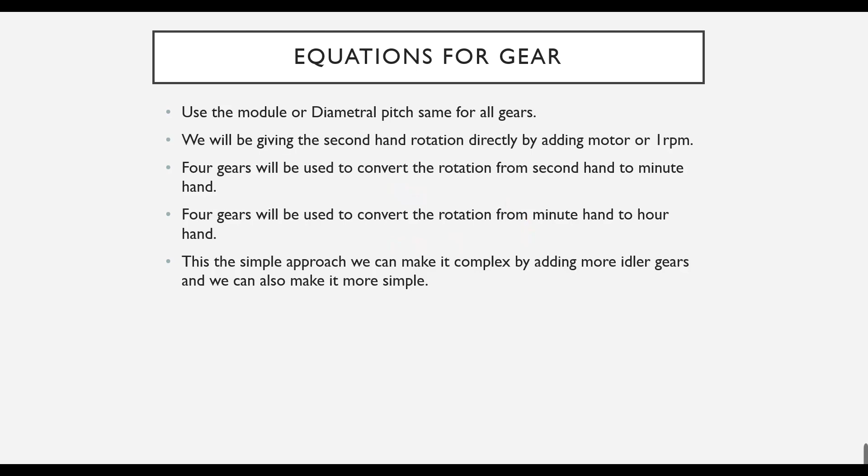Now we can also complex this by using different idler gears, and we can also make it more simpler by using only 2 gears to convert the rotation from second hand to minute hand. Now you can see on the screen we require 1/60 gear ratio in order to convert the rotation from second hand to minute hand. As you know, when second hand completes its 60 rotations, then 1 minute hand rotation will be completed. So here is the gear ratio for the compound gears.

Now T1 and T3 are the driver gears, and these will be the teeth of the pinion, and T2 and T4 are the teeth of the gear, which will be bigger in size. So here are some calculations. As you can see, I split this 1/60 into 1/6 and 1/10. So T1/T2 is equal to 1/6. Similarly T3/T4 will be equal to 1/10. Here is a mistake. This will be T3/T4, as you can see here.

I will be skipping some extra work. I just changed the equation for module into radius, and here x is the distance between center of gears. Here you can also define x as r1 plus r2 or r3 plus r4. So we have to assume the module or diametral pitch. I will be working with module, so let's say I assume 3. So if I assume module 3, then I will have to calculate, or you can say assume the value of x, but there will be a pattern to assume the value.

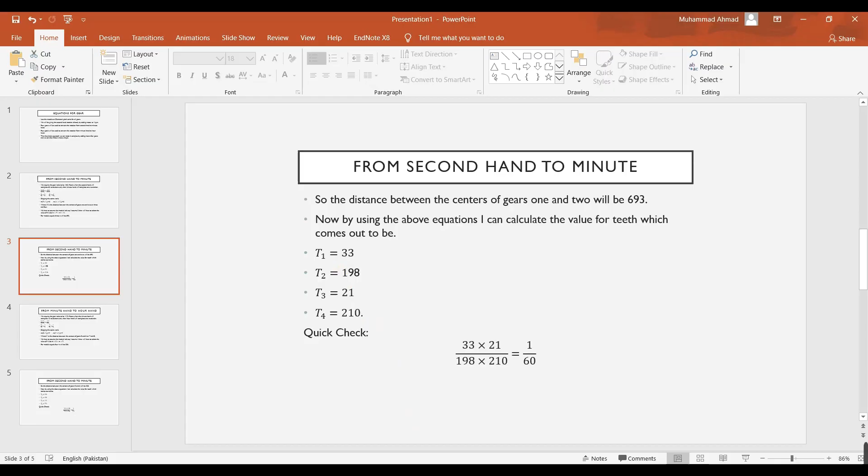Now here some properties of the gear can be changed. So select module 3. Now for the first gear our number of teeth are 33, so we will select 33. Select 33 right here. Keep pressure angle 20, face width 4, or you can change it.

Now hub style, select B, because we have to create a shaft afterwards, so you don't need to create a shaft if you select hub style B. Here make the hub diameter as you want. I will keep it 7. Overall length make it 50.

Now nominal shaft diameter keep it 6, or you can change it, you can make it 4 as you want. Keyway make it none, and show teeth make it 33. Select. Here it is asking for another component, just cancel it. Now we need to save it. We will save it as part file. Save as, gear 1. Now save it as part file.

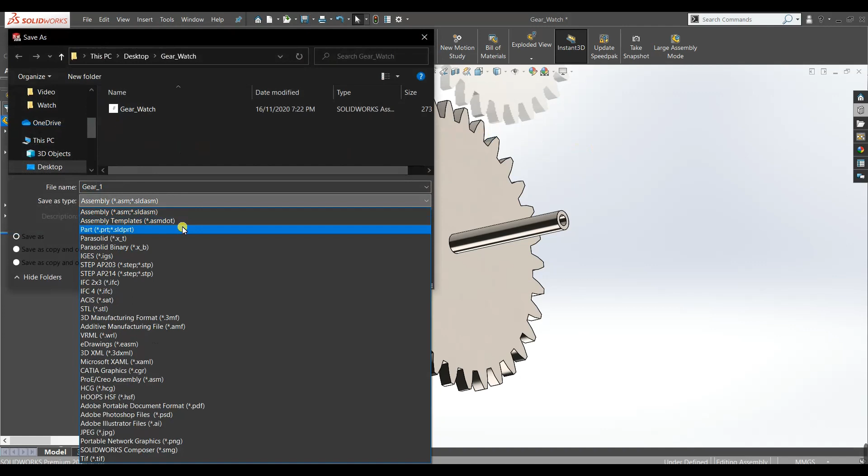Now we will create gear 2. If it is asking to save it, if you want to save the assembly in order to make the changes, you can save it, but I will not save it. So I will say don't save. I will create a new assembly. So again drag a spur gear. Now I will create gear 2 which has 198 teeth. So just select 198 teeth. Here we have 198.

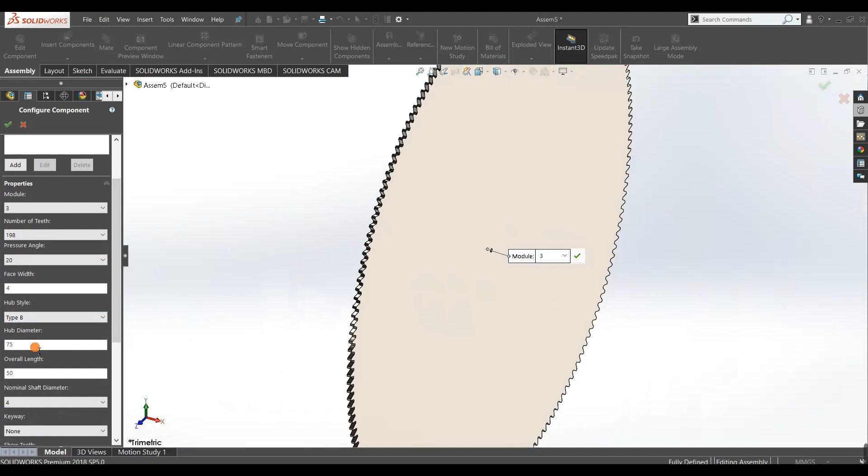Now face width 4, hub style B, hub diameter make it 7, overall length make it 30 or 40, sorry it is 50, 40, we have to make it 40. Nominal shaft diameter make it 5, keyway none, accept it. Now cancel it and save it as part file. Save it as part, gear 2.

Going to gear 3. Again, drag a spur gear. Module 3. Now we will make gear number 4, and then afterwards we will make gear number 3. 210. Face width 4. Now we need to make the nominal shaft diameter 7 and make the hub diameter 8. Accept it. Save it as gear 4 part and gear 4.

Now again, spur gear. Now we need to make it, it was 21, right? We need to make it 21. So here 21, face width 4. Hub diameter, now we don't need hub. Nominal shaft diameter, make it 7. Accept it. Cancel. Save it as part file and gear 3.

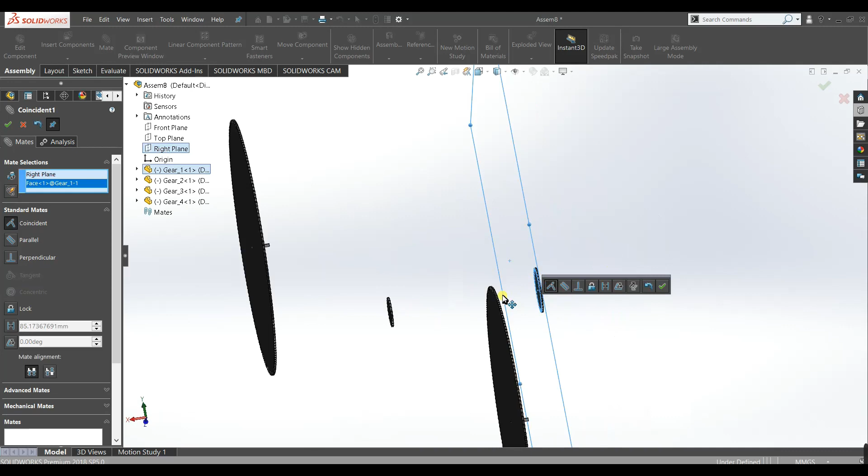Now we will assemble the first 4 gears and then we will make the further gears and then we will make the further assembly. So first we will assemble the first 4 gears. Go to assembly. Now we need to open these 4 gears. Open. This is the first gear. Now make it float. Mate the right plane with this back face here. Make it coincident. Accept it.

Now we need to draw a sketch on the right plane. We just need a center line to define the center to center distance. The center to center distance, we calculated right here, 693. Now this is D1 plus D2. I mistakenly spoke it R1 plus R2. Basically it is D1 plus D2. So we will just divide it by 2 and the answer we get is 346.5. So make it 346.5. Accept it. Make sure it is coincident. Accept.

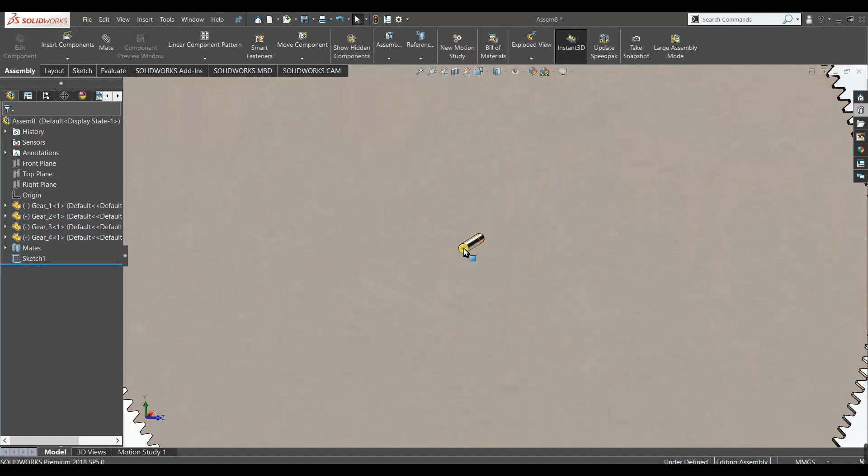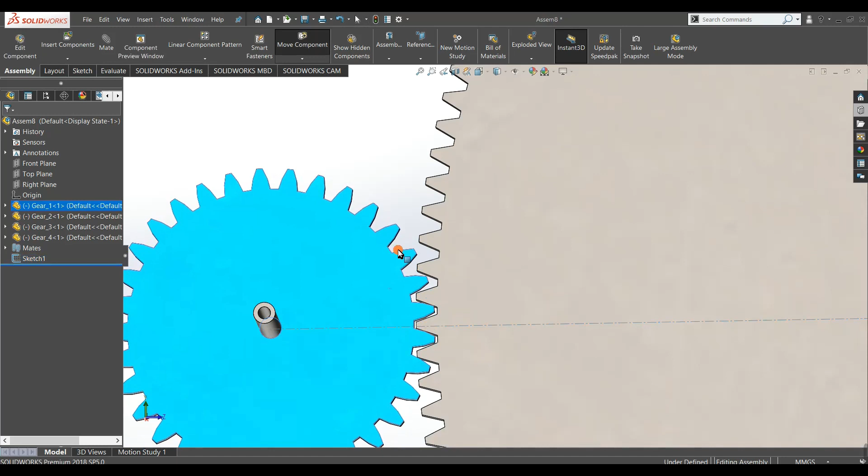Now we need to select this face of gear 2 and mate it with this point right here and make it concentric. Accept it, and make this face and this face coincident. Accept it. Now we need to make this point and this face concentric. Accept. Now these two gears are defined completely, and you can see the gears are perfectly meshing.

Now we will add a gear mate. Go to mechanical mates, gear mate, this face, and this face right here. Now give it the number of teeth. It was 33 and it was 198. Accept. Now we will see if the gears are perfectly meshing or not. So yes, you can see the gears are perfectly meshing. It is perfectly working. Make it hide.

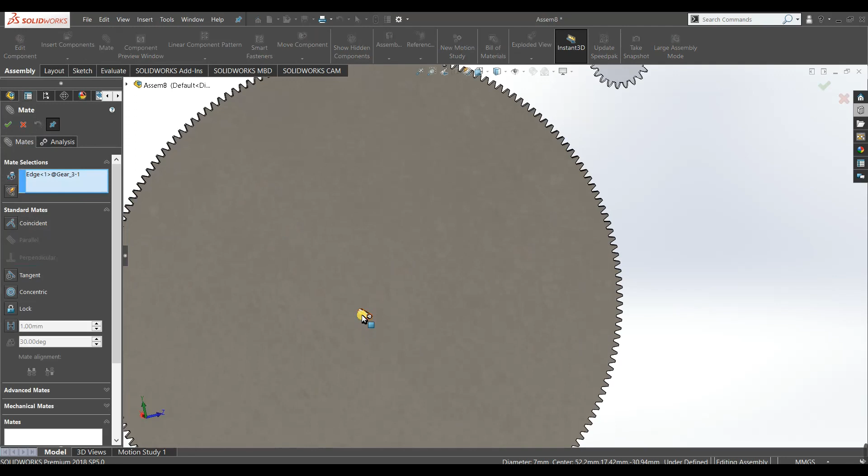Now we need to make this gear mate and concentric with this. Now just drag it up a little bit. Now the motion will be transmitted from gear 2 to gear 3 via a key. So we need to make a key. Open this part.

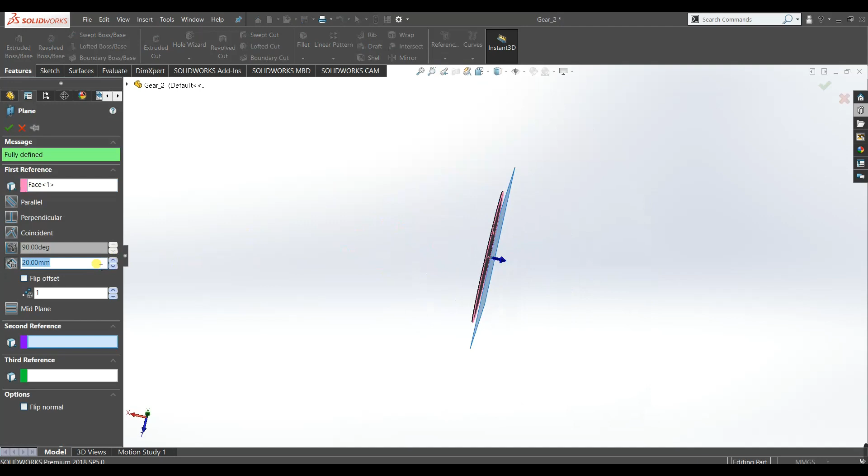Now we will define a plane. Make this face first reference and make it 20 mm. Now sketch on this plane. Make it normal. Now select a line. Make it construction geometry. Now select a corner rectangle. Draw a rectangle like this. Make this edge and this edge concentric.

Now make these two points and this line symmetric. Now define this length as 0.5 and this as 1. Now extrude it up to 4.

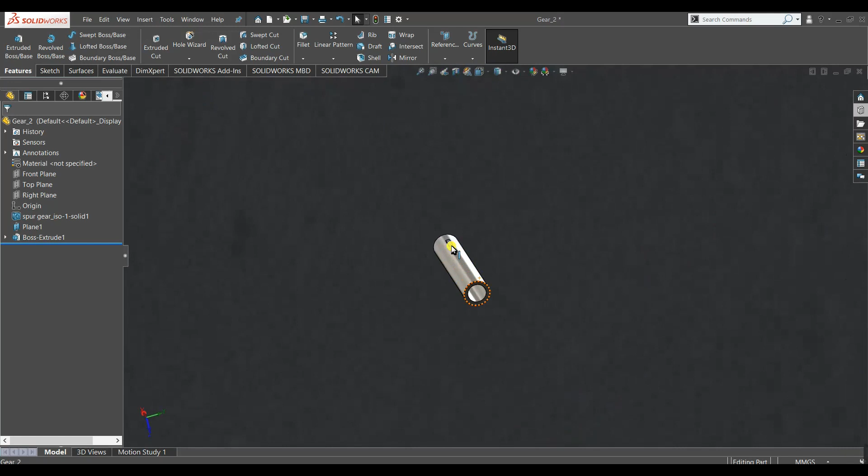In watch gears there is not very much power to be transmitted, so this keyway will work. So our keyway has been generated. Now go back to assembly. Now we have to make a keyway in this gear 3. Open this part.

Now select this face, sketch. Okay, make a corner rectangle. Select, draw a center line like this. Okay, now make these 2 points and this line symmetric. Now dimension it 0.5 and it must be 1. Okay, now it looks fine.

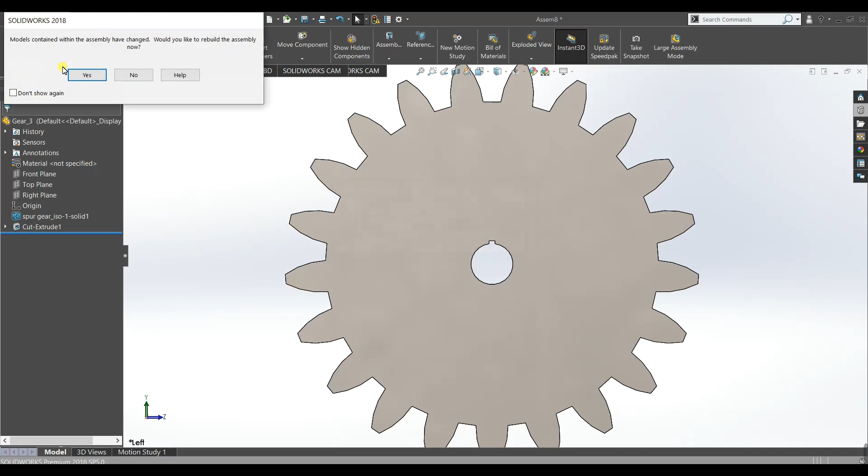Now make an extrude cut through all. Okay, now our keyway has been generated. Go back to assembly. Okay, now select this face right here and mate coincident with this face. Make it coincident. Accept it. Okay, there must be some error. Let me see.

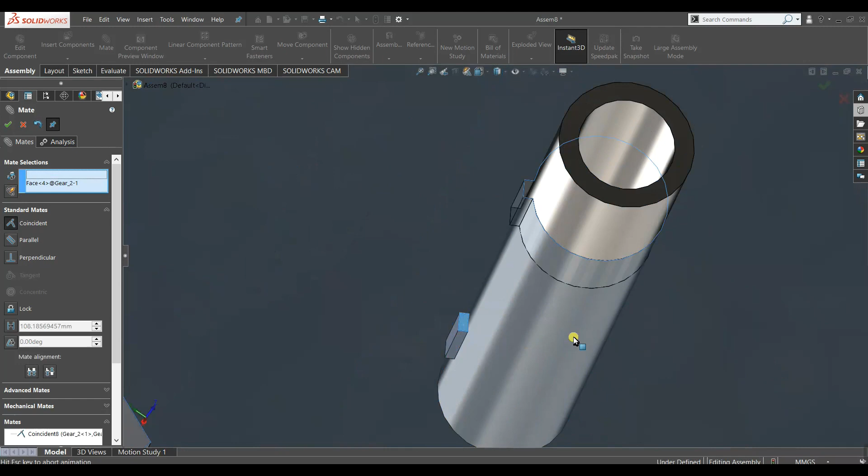Okay, select this face, mate, and this face. Okay, now it is working. Now select this face, top face of the gear and top face of the keyway. Accept. Here you can see our gears are now moving as required.

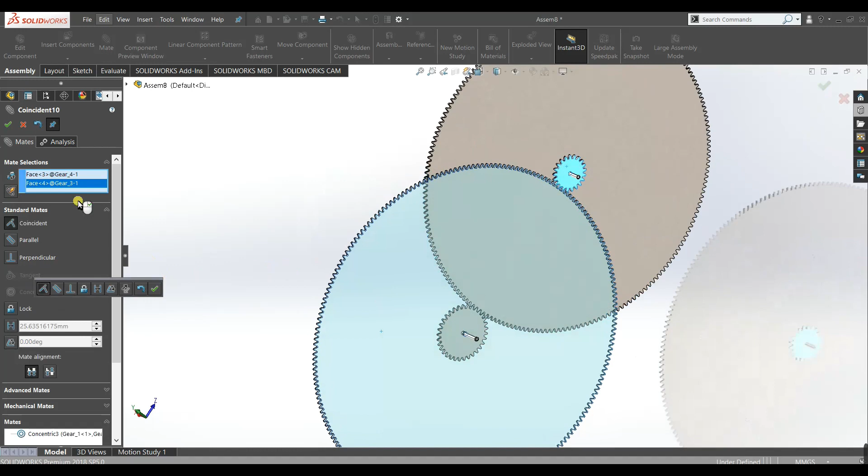Okay, now we need to mesh these two gears. First, let us see if our shaft diameter is equivalent to the hub diameter. It is 7 mm and it must be 7 mm. Okay, it is 7 mm. So we can now make these two shafts concentric. Make these two shafts concentric. Accept it. Now make this face and this face coincident.

Okay, now we need to apply a gear mate between these two gears. First, we need to make it right. Okay, now you can see there is no colliding between the gears. So now we can mate them. Go to mate, mechanical mate, here gear mate, select this face and this face. Right. Now first we selected this face. Okay,

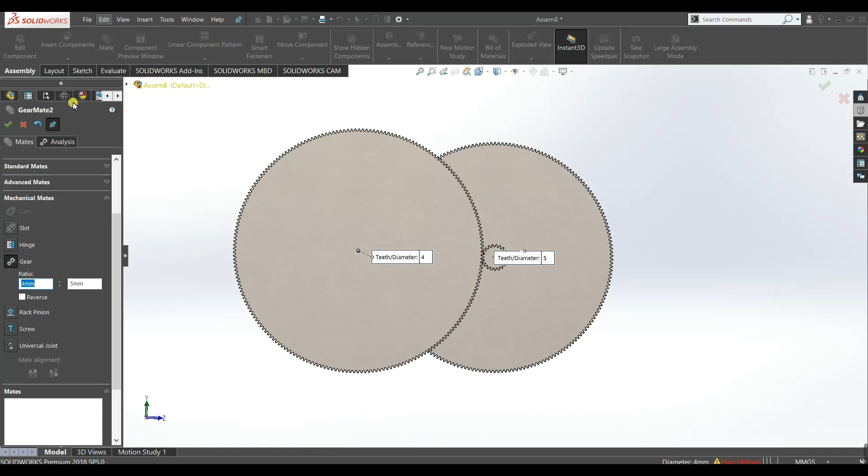you can see this has been turned into yellow, so it is saying that there is some error. So let us see what the error is. Okay, there is no error. Okay, I don't see any error. So we will apply mechanical mate, gear mate here, select this face.

Okay, here I see the error now. So we are mating this gear with this gear and this gear has already been mated. Because you can see this shaft is of this gear, not this. So we will just hide this gear for a second and we will select this face. Okay. So that's why an error was popping up.

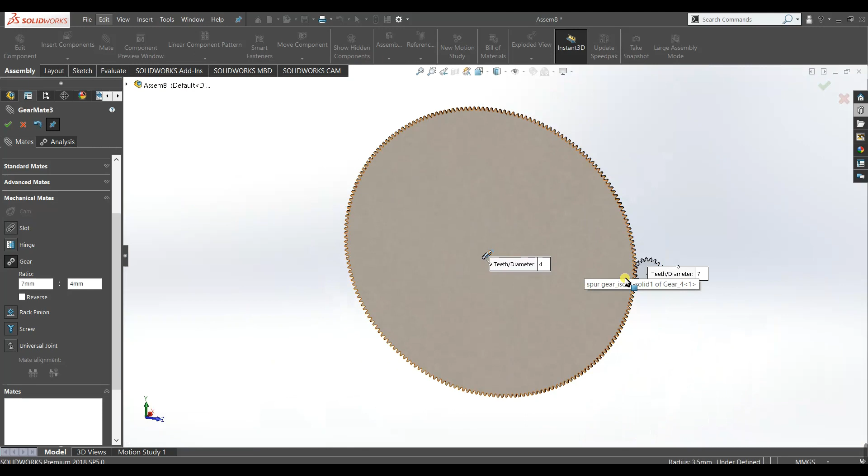Mechanical mates, gear, select this mate and select this face. Okay, now give it, what was it, 21 and 210. All right, it was 21, it was 210. All right, now we can show this. Okay, let us see if it is working. Okay, it is not working. Why is it not working?

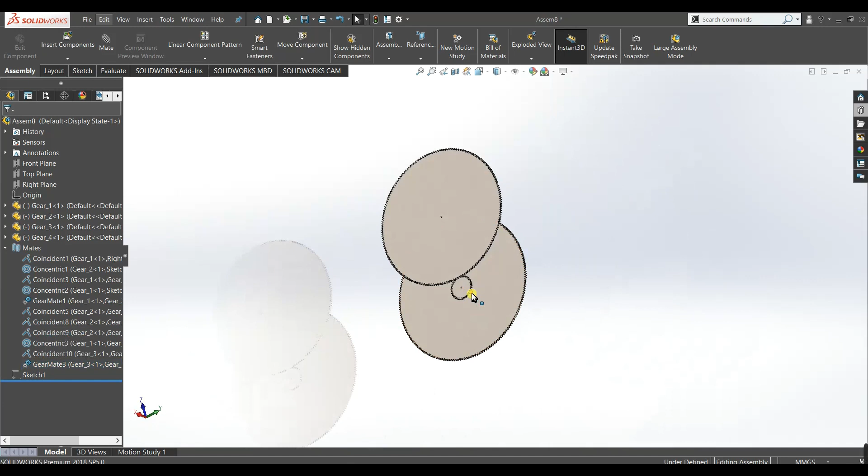Okay, just delete this. Okay, apply mechanical mate and go to gear mates. Okay, we need to first hide this gear so we can choose this face. Again go to mate, mechanical mate, gear mate. Okay, select this face.

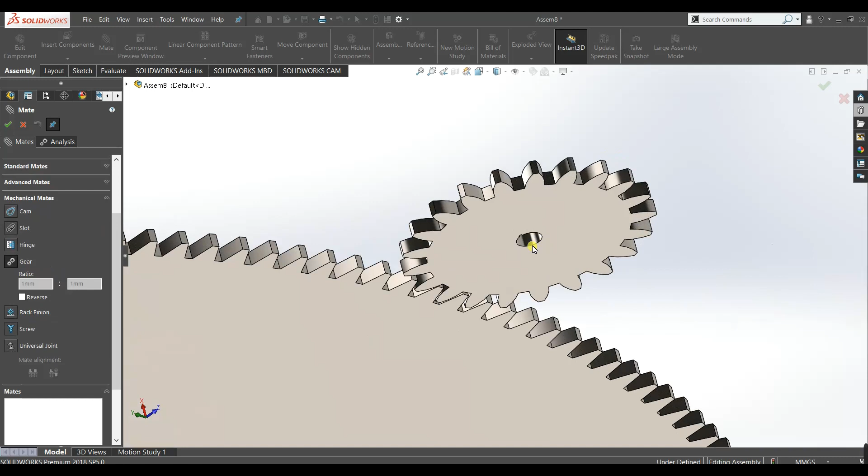Okay, we also need to hide this gear right here because the shafts of the previous gears are being selected. So we are just applying the mate on the previous shaft or previous gears. So that's why an error was showing. So select this and this face. Okay, now make it 21 and make it 210. Okay, now it is working. Now show this and also this. Okay, now let us see if it is working. Okay, now both the gears are working.

Okay, now we need to make some needles. Okay, this is the shaft of the second needle. So we will just open part. So here go normal. Here sketch on this face. Okay, now draw a center line. Select line. Alright.

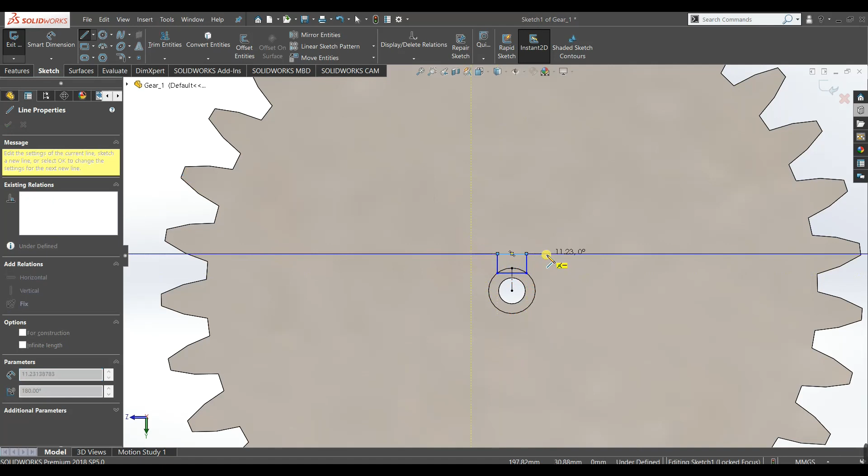Now draw a needle as you want. I will just simply draw a simple needle. Now make these two lines equal and parallel as well. Equal and parallel. Okay, now make these 2 points and this line symmetric. Okay, and also make these 2 points and this line symmetric. Okay, now make this point and this point vertical.

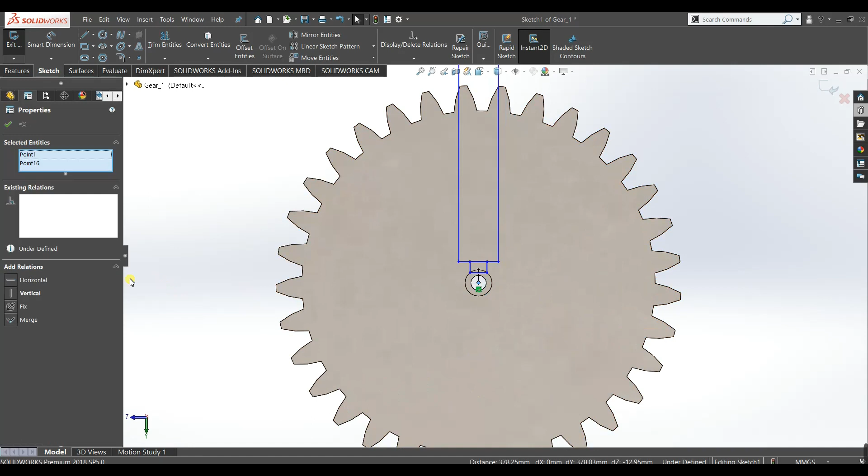Okay, you can adjust the size as you want. Okay, now it will work fine. So go to features, extrude both sides, make it reverse direction. You can make it 0.2 mm. Okay, the sketch has intersecting contours. Now we need to select some contours. Select this one and this one. Okay, now our needle of the second hand has been generated. Okay, go back in the assembly. Yes, you can see here.

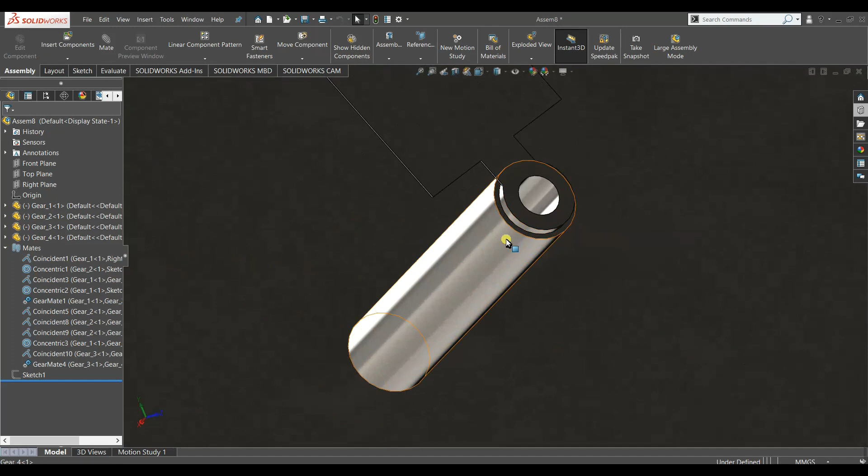Now we will do this on the minute hand gear. Okay, now this is the minute hand gear shaft. So just select this and open part. Okay, now we will similarly select the face. This face, sketch, make it normal, center line like this, and here draw a similar sketch. Okay.

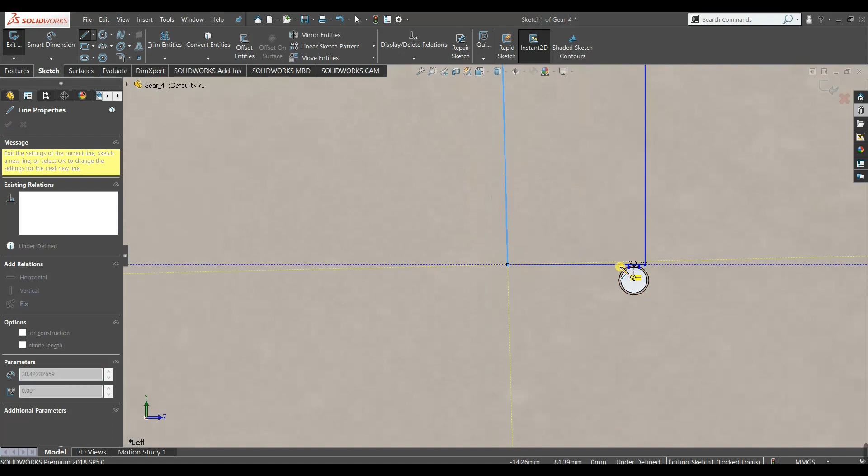Now make these two lines equal and parallel. Okay, you can see here there is an extended line. You can just trim it. Okay, select. Now we will make these 2 points and this line symmetric. You can adjust the size. Okay, now adjust the needle tip.

Okay, now you can extrude it. Now similarly select the contours and this one, reverse the direction, make it 0.2, accept. Okay, now our needles have been generated. Now go back in sketch.

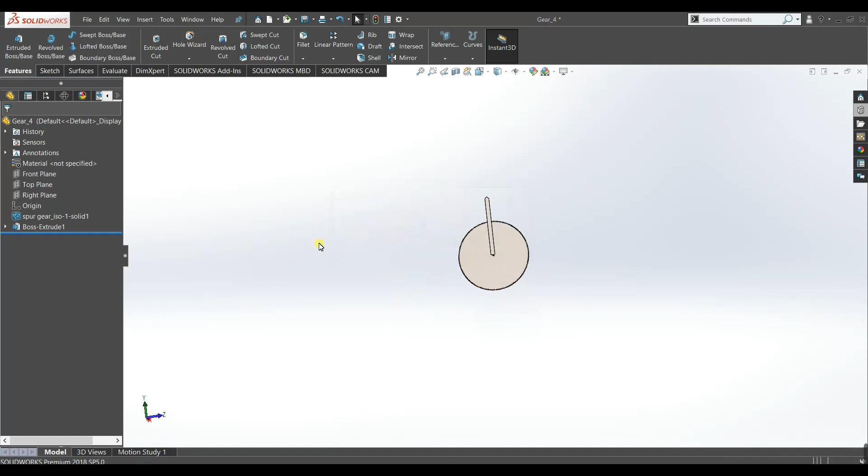Now these two needles are not colliding. Okay, now we will save this assembly. Here, watch.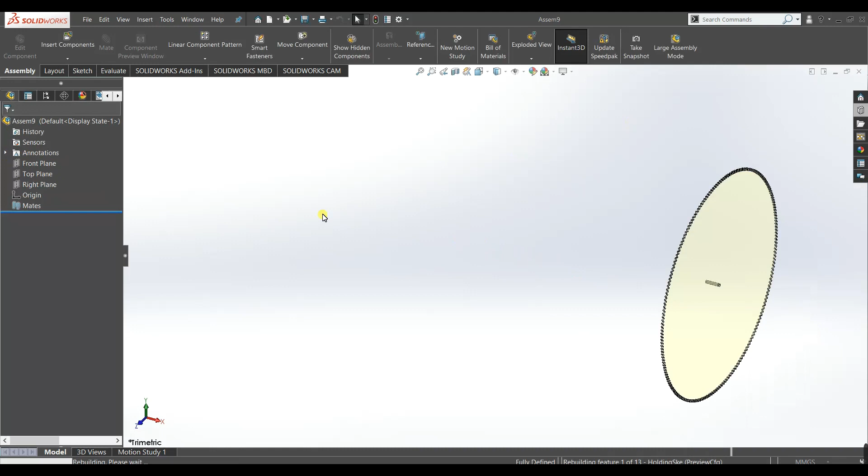Now we will design the gears to convert the rotation from minute hand to hour hand, and then we will continue this assembly. Here we will again design a spur gear of the required number of teeth using design library. Now we will select module 4 and the number of teeth are given here. Select module 4. Number of teeth should be 28, face width 4, hub style type A, nominal shaft diameter 7, key none, accept it, cancel it, and save it as part. Make it gear 5.

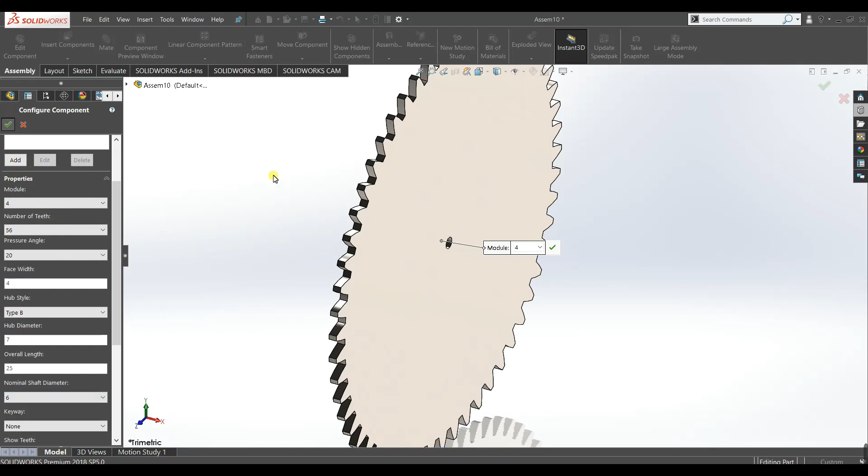Now again design a gear. Now here we need 56 number of teeth. So make it 56. Face width 4. Make hub style type B. And make hub diameter 7. And overall length make it 25. And nominal shaft diameter make it 6. Accept it. Now save it as part gear 6.

Now again we will design gear 7. Okay, now the number of teeth required are 12. So make it 12. Pressure angle, face width, make it type A. And nominal shaft diameter make it 7. Okay, accept. Now again save it as part. Now all gears must be saved as part.

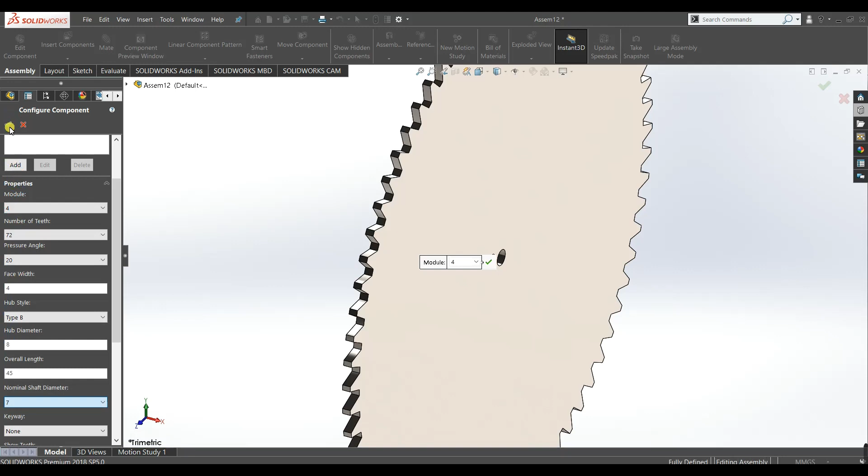Now we will design our last gear. Go to design, libraries, spur gear. Now make it 72 teeth. So here we have 72. Hub style make it B. Hub diameter, make it 8, and overall length make it 45. Nominal shaft diameter make it 6, or sorry, it should be 7. Sorry, it is 8. No, it is 7. Okay. Now again save it as part and gear 8.

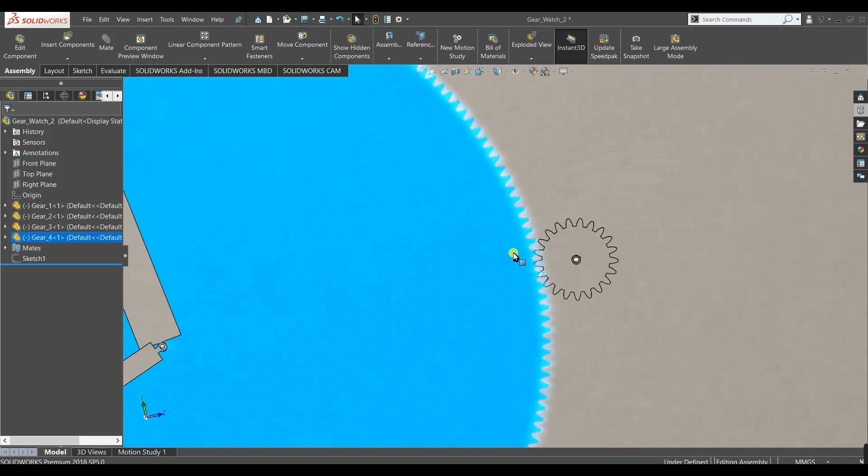Now we will open our gear watch assembly. Here you can see this is our seconds hand, and this is our minutes hand. Here you can see there is a problem. Our seconds and minutes hands are not aligned in the same direction. The problem is right here. So first of all we will fix this problem. Delete it. We will again define it.

It creates problems when there is an impact between gears. So first hide the first two gears. Now select mate, make sure there is no collision between gears. Now go to mate, mechanical mates, gear. Select this face and then select this face right here. Now give it 210 and give it 21. Accept it.

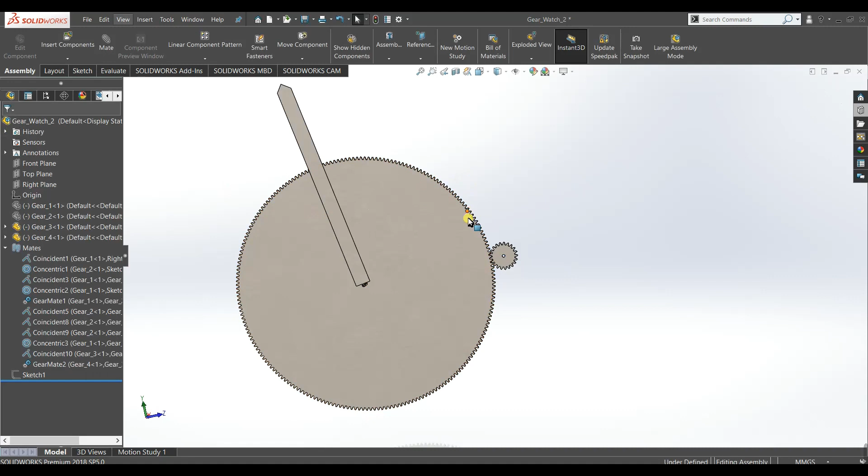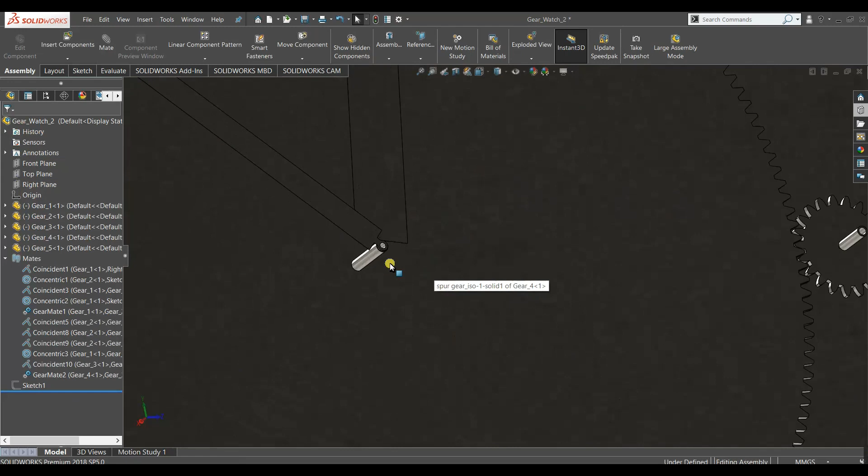Now it is okay. Now just make it show and also make it show. Now we will see if these are working fine. Now you can see here our minute and second hands are moving in the same direction. So it is okay. Now we will add our gears for the hour hand. So insert components, gear 5, open. Now the motion from gear 4 to gear 5 will be transmitted via a key. So we define a key.

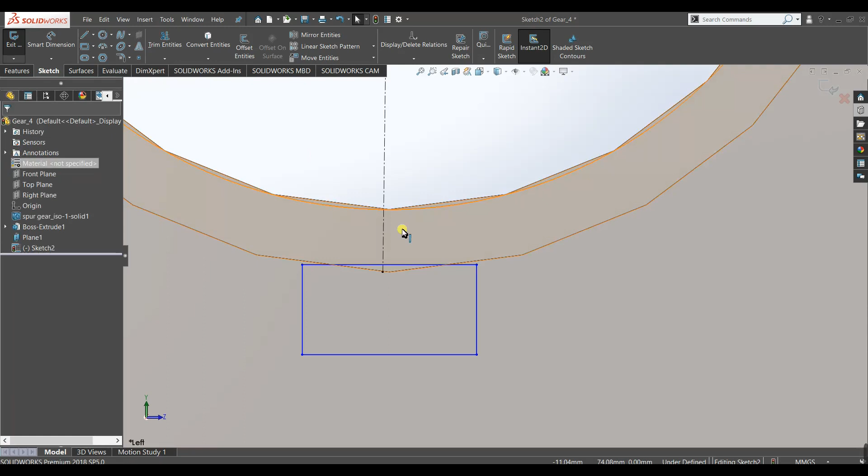Similarly, first we define a plane, make it 5. Now go to sketch, draw a center line, select. Delete it. I'll just delete this. Now make this edge here and this point here coincident. Similarly, make this edge and this point coincident, and now make these 2 points and this line symmetric. There is an error. Delete this relation here. Now it is okay.

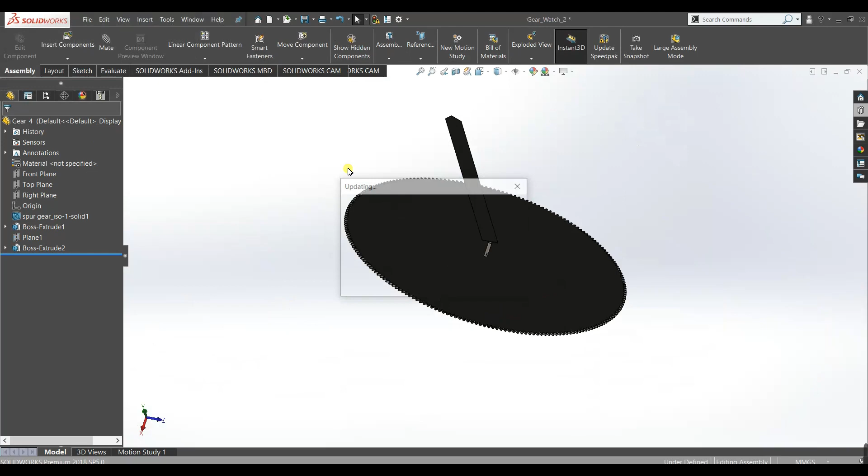Now define the dimensions. It should be 0.5 and it should be 1. Accept it. Now go to features, extruded boss base, and make it 4. Accept. Hide this plane. You can see a key has been generated. Go back to assembly. Now create a keyway in this gear. Open part.

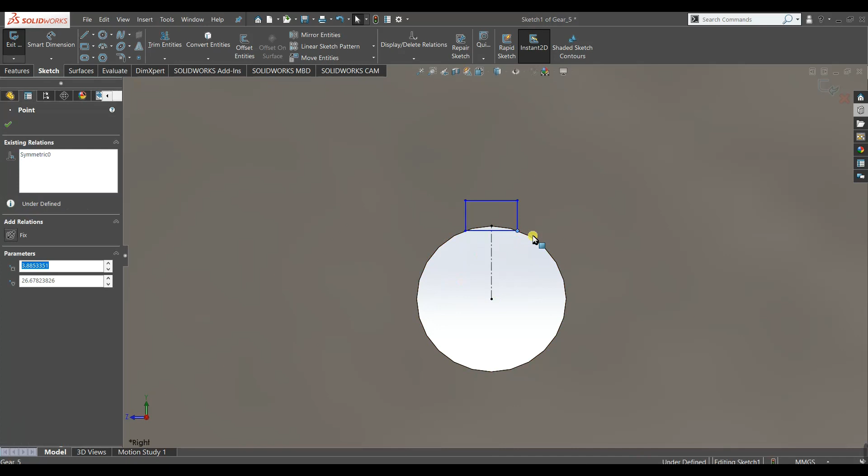Now sketch on this face. Make it symmetric and make this edge and this point coincident. It is coincident now. Now make it 0.5 and make it 1. We have to define an extruded cut here. Make it through all. Now go back to assembly.

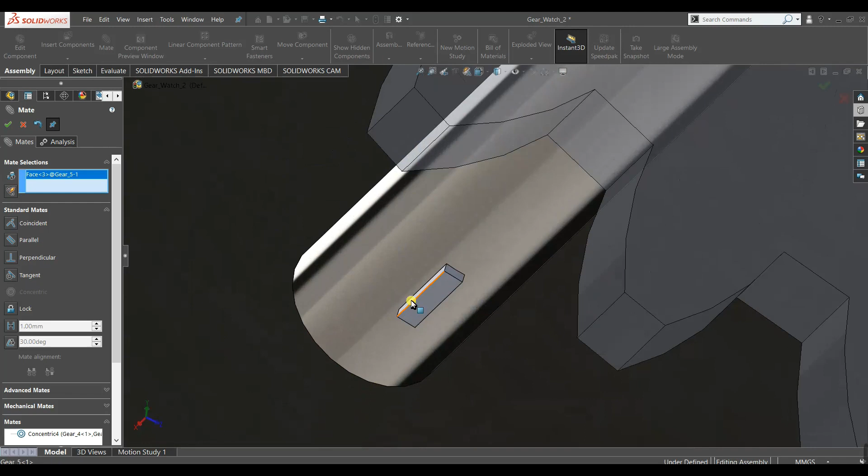Now we need to mate these two gears. So first we will define a concentric mate like this. Drag this up a little bit. Now make this face and this face coincident. Now make this face and this face coincident. Accept it. Now you can see our fifth gear is moving according to the fourth gear. Now we have to mate our fifth gear with the sixth gear.

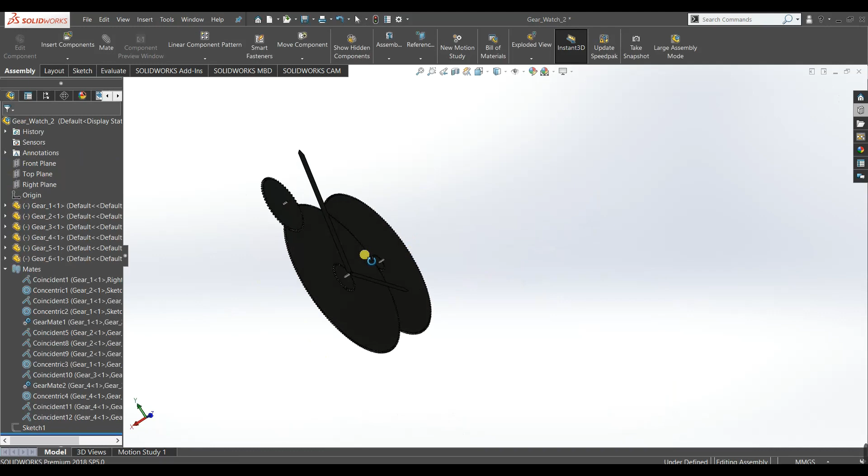First we will sketch on this face. We will just define the distance as we did before. You can see every step is similar to the first 4 gears. Only the number of teeth is changed and the distance between the gears is changed. Now we divide this by 2, which will be equal to 168. So we define this 168. Okay.

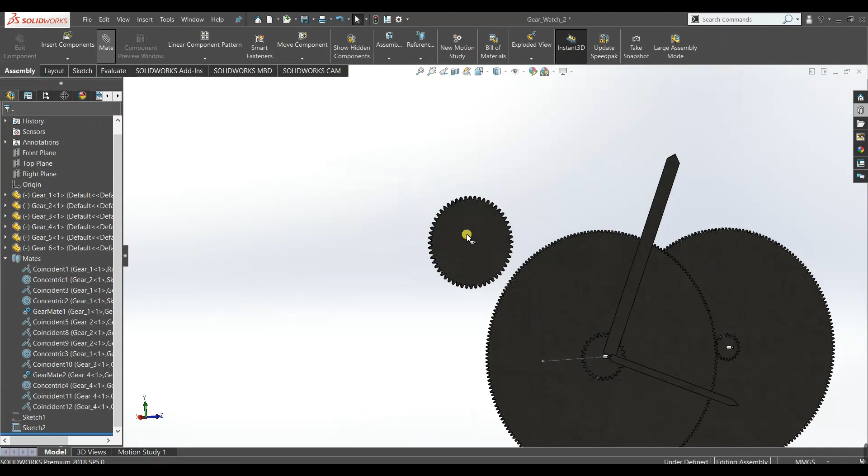Okay, now make this face. Okay, first exit the sketch. Now make this face and this point coincident. Sorry, concentric. Again I made the same mistake. Make it concentric. Okay, now make this face and this face coincident.

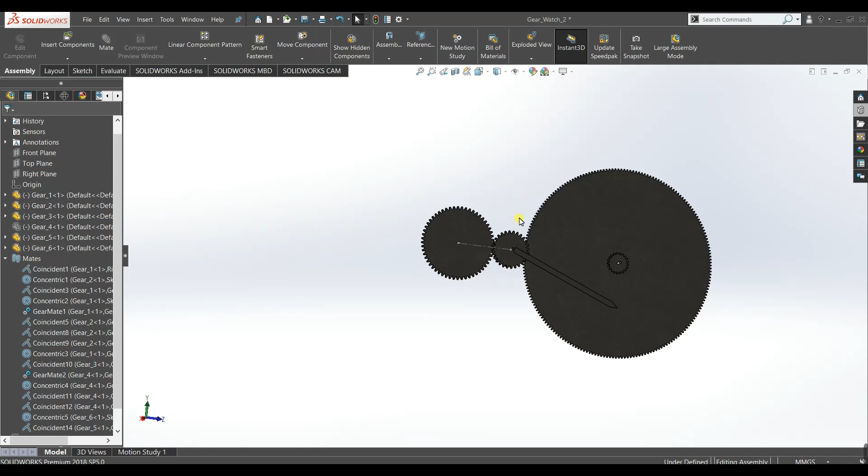Okay, now we will just hide these gears, so we can easily mate our new gears. I think we need to hide this gear also. Hide component. I think now these gears are not colliding, so we will define a gear mate: mechanical mates, gear, here and here, and define it.

What was it? It was 28 and 56. So make it 28 and make it 56. Accept it. Okay, now the gears are perfectly meshing. Okay, hide this line.

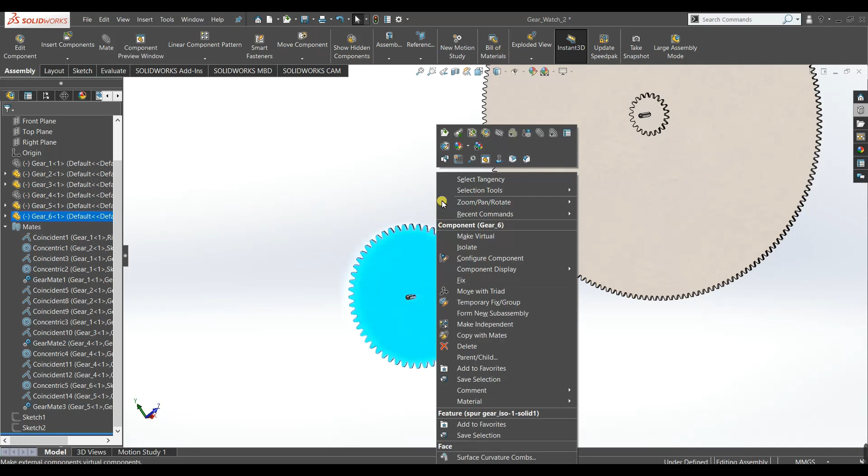Now we need to mate our gear number 7 with this gear. The motion from gear 6 to gear 7 will be transmitted via a key. So we will design a key here. Just open part. Similarly, we will define the key as we defined before. Plane. Okay, go to sketch here.

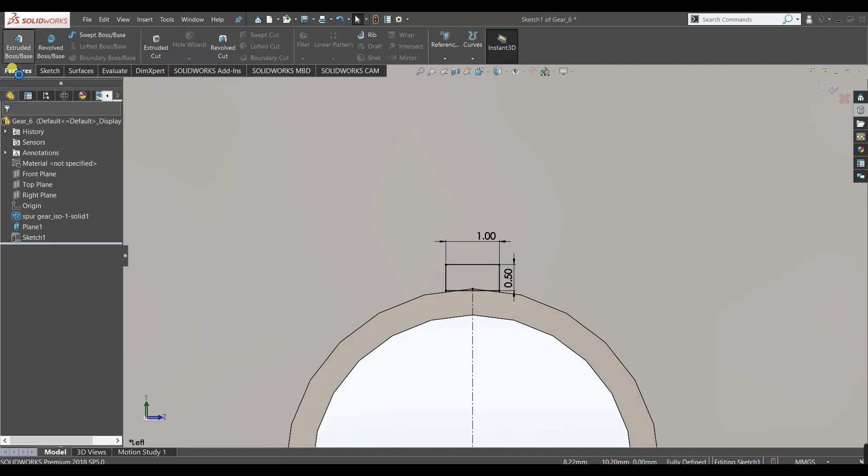You can see, make it symmetric, and we will make it coincident. I think this is coincident. Okay, now make it 0.5, make it 1, extruded boss, make it 4. Okay, accept it. Hide this plane. Okay, our key has been generated.

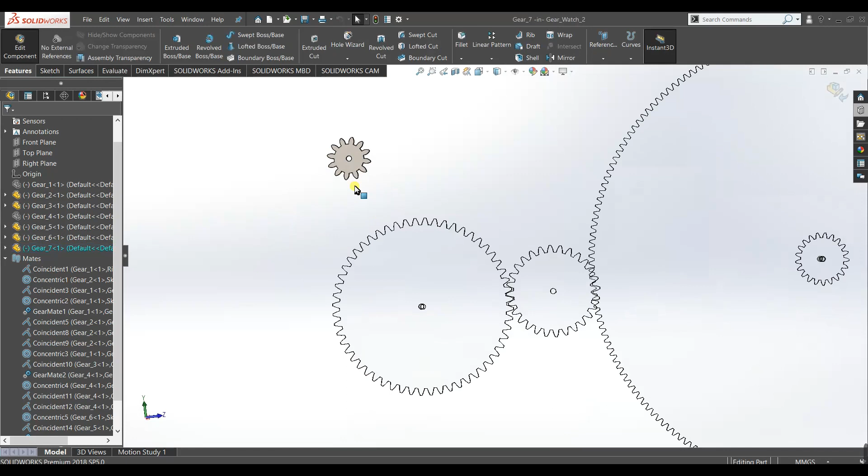So go back in our assembly. Now insert component 7. Okay, we need to define a keyway here. We can define it in the assembly. Go to edit part. Okay, just make it normal. Go to create a sketch on the face. So sketch it.

Make these 2 points and this line symmetric. Define it 0.5. Okay, now go to features, extruded cut, make it through all. Okay, now our keyway has been generated. Now mate this, go to mate. We will first make it concentric. Here concentric mate.

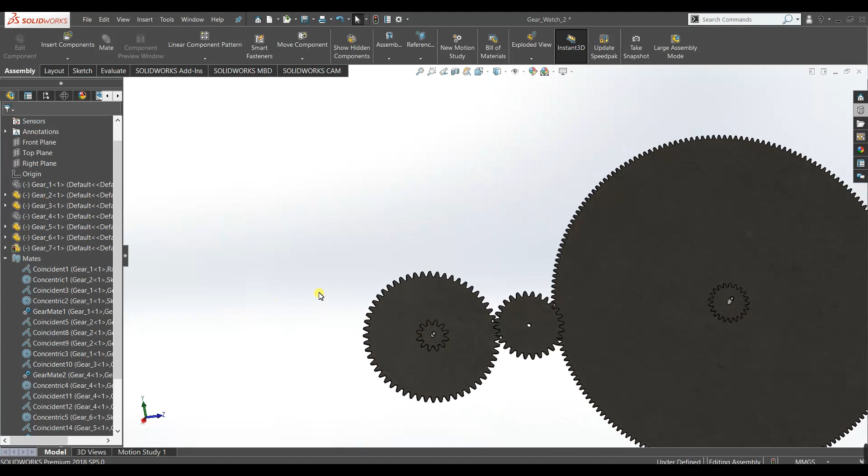Okay, now make this face and this face right here. Accept. Now make this face and this face, accept. Alright, now our seventh gear has been defined in the assembly. So our last gear is left now. Okay, we just show this fourth gear to see our shaft.

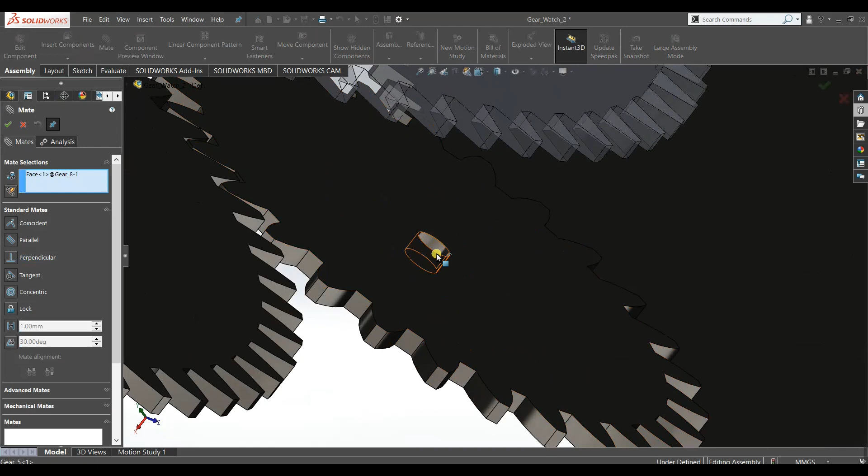Okay, so again hide this component. Now insert component gear 8. Now mate this gear shaft and this circular section here concentric, accept it. Okay, now make it perfectly aligned so that these gears must not collide with each other. Yes, now here, like this.

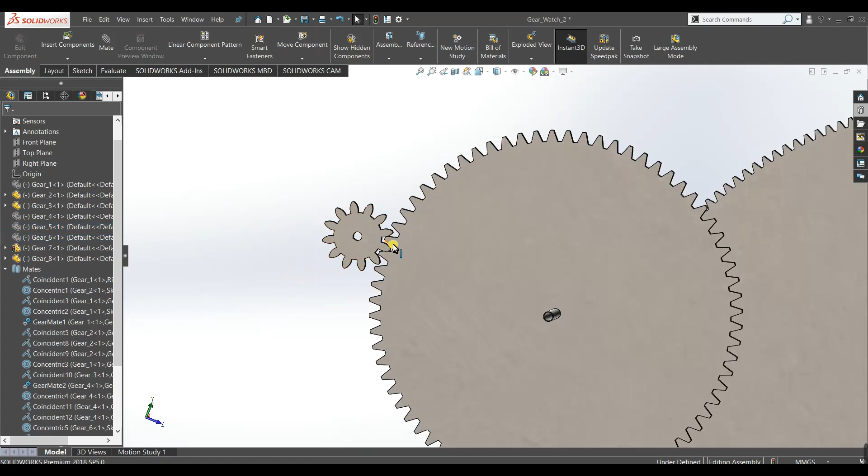Go to mechanical mates, gear. Okay, now select this face and, okay, we will hide these two gears also so that we do not mistakenly select the surface of these two gears. And hide this also. Okay, first make these two faces coincident.

Okay, now gear, make this face and this face. Now define the number of teeth. So it should be 12. It should be 72. Okay, you can see the gear is perfectly meshing. Now we can show all the gears like this.

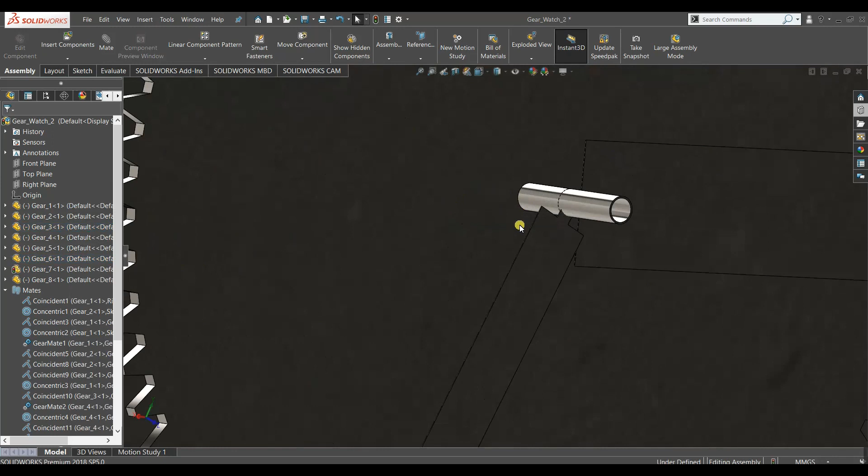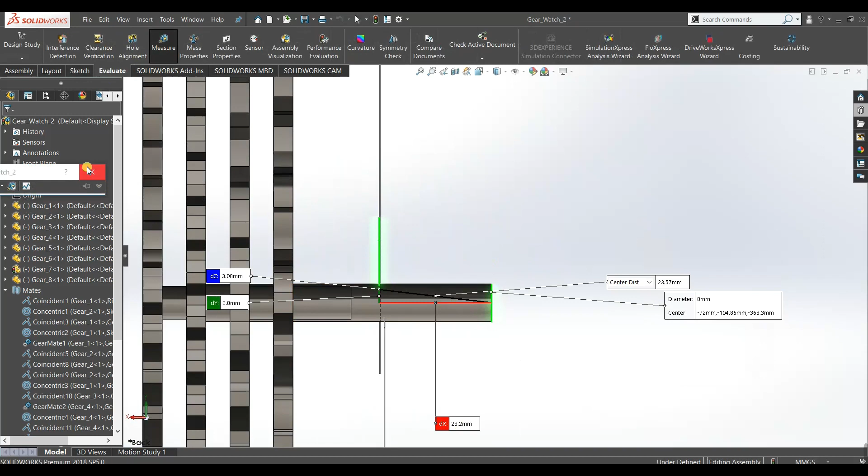Now you can see all our gears are moving. So we need to define our hand. Okay, I think there is some problem. We need to make it a little bit smaller. We will just first check how much we need to make it small. The distance between these two lines is 23.2. So we will make it 24.

Okay, now select the front plane, sketch. We need to select these two lines and make this length 24. Go to extruded cut and through all, both. Accept it. Okay, here you can see, I think these two shafts are colliding with each other. Okay, we will make it right.

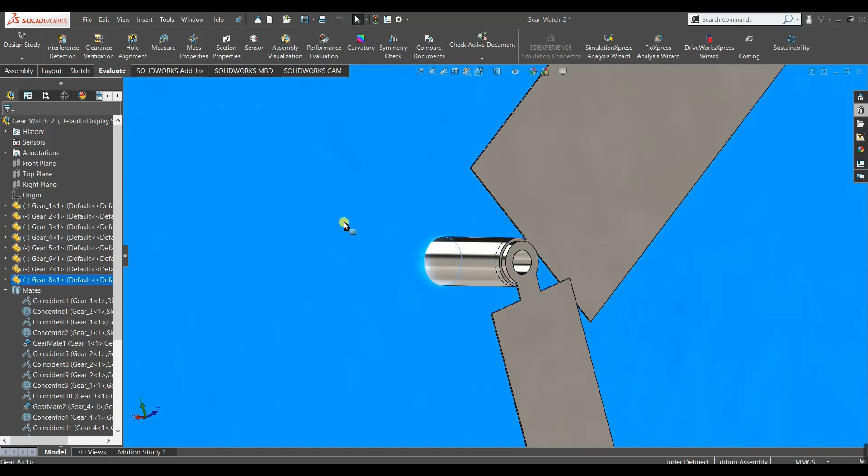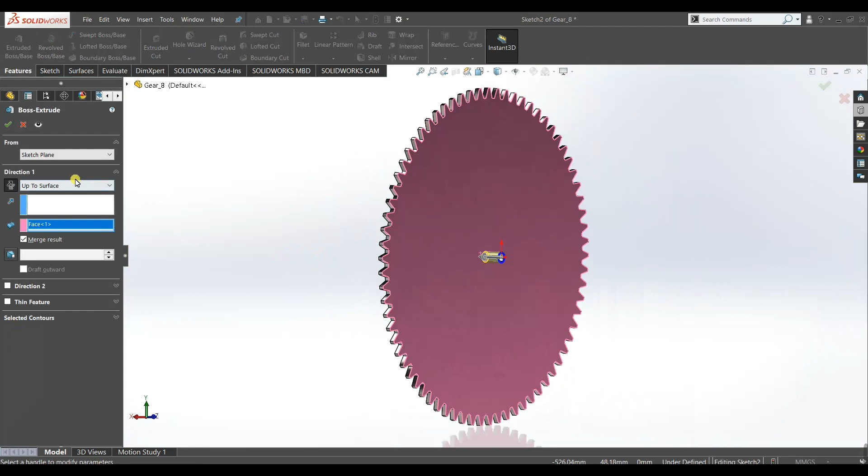We will just select this face and open part. Okay, just select this face and sketch. Now go to extrude, boss, select this and select this surface. Okay, now close. Okay, concentric.

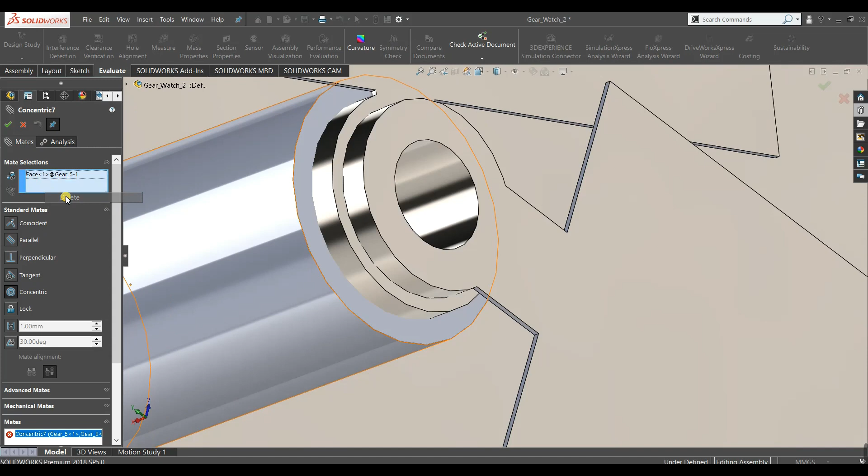Okay, go to this concentric mate, edit feature. It is saying this face is missing. Alright, just delete this and select this face and accept. Okay, now the error has been removed. Now we will just draw our hand.

Okay, so we will sketch on this face. Sketch right here. We will draw a center line like this, and similarly as we drew before, we will draw a hand.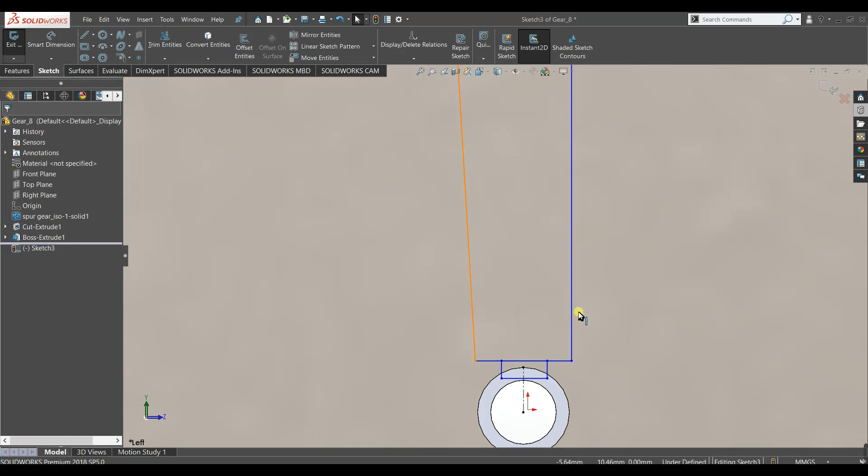Okay, make these 2 points and this line symmetric. Make these two lines equal and parallel. Make these 2 points and this line also symmetric. Okay, now just adjust the dimensions. Now adjust the needle tip.

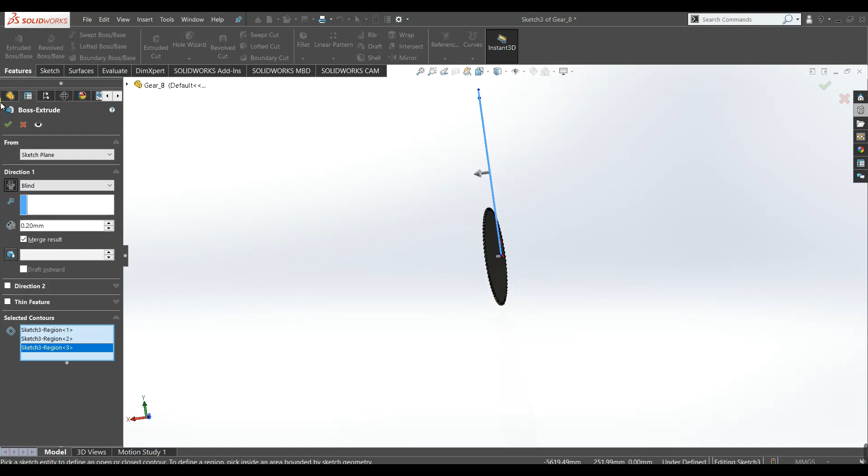Okay, go to features, extruded boss. Now we have two contours. Select this one and this one. Make it 0.2 and make the direction towards the gear surface. Reverse it. No, it's okay. Okay, now our hand has been generated. Now go to assembly.

Okay, now let's check if it is working. I think this was our, okay, this is our second hand. Okay, so let's move this.

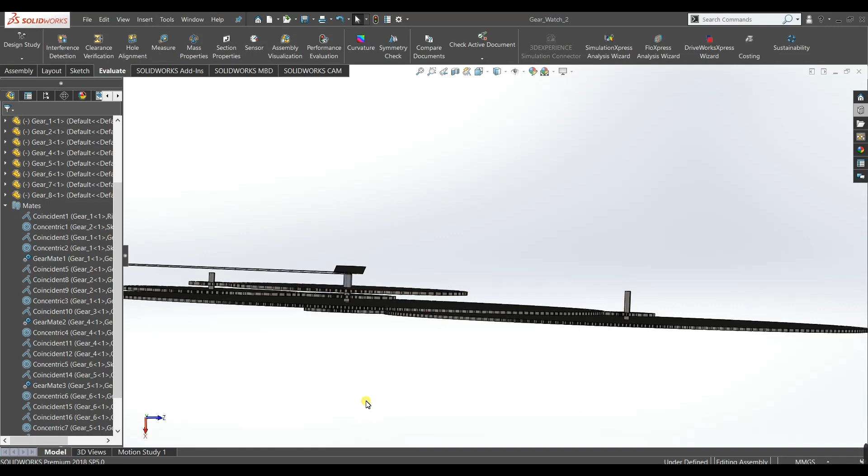Okay, now we will create a dial. First save the document. Okay, now almost all our work has been completed, so we will just create a dial here. Okay, new part. We will name it dial.

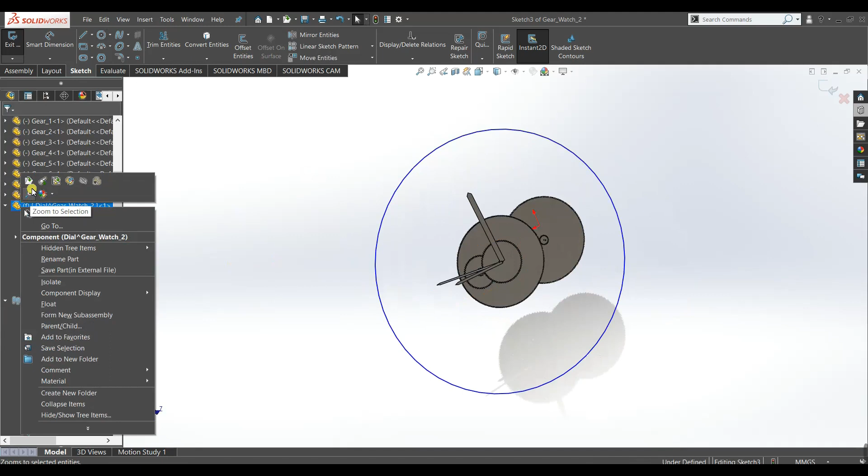Okay, I will just select right plane and sketch on it. I will select the center and I will draw a circle from the center. Alright, okay. Now I will go to part and open part. Okay, now I will extrude it. Where is it?

Okay, I made a mistake here. I will have to first go to edit part. Now I will have to draw a circle. Sorry, sketch here and sketch on right plane. You must check which plane you will work with. It might be your front plane or your top plane, depending upon the first plane you selected to design with. So I will draw a circle. Okay, accept it.

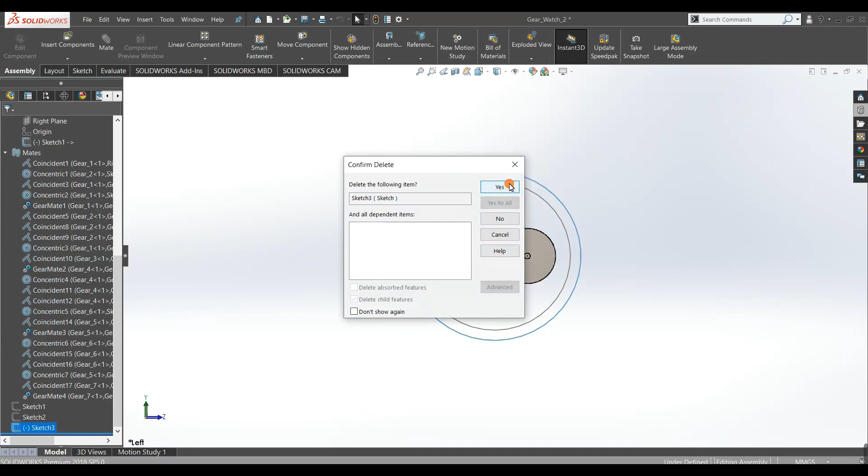I will delete this sketch because I don't need it. I need this circle in the dial part. Now open part. Okay, I have this circle. I will extrude it up to 20, or 15 mm. Make it 15. Okay, sketch on the face.

Now we will draw a polygon on the center. This parameter here, number of sides, make it 12, and make this side horizontal. Select this polygon for construction geometry. I'll make it a little bit big like this.

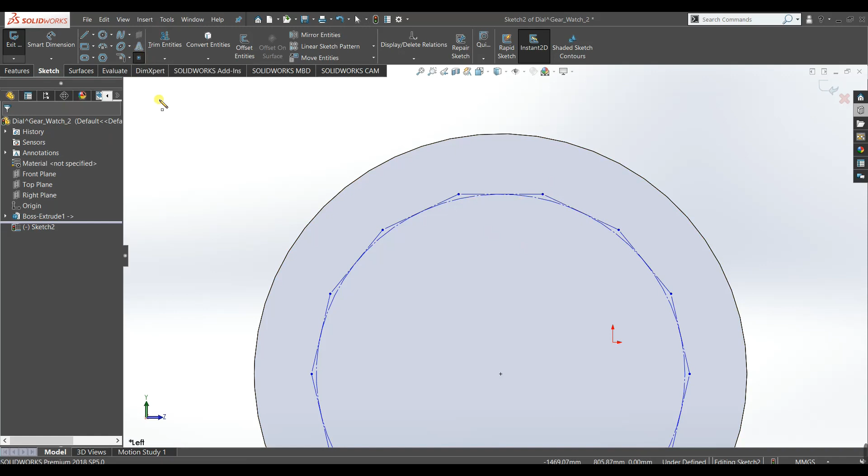Now I will add some numbers here. I will draw a line here for this one only, and add text. I will select this line, write text 12, make it mid plane, uncheck this box, go to font and make it 40 points. You can see our 12 has been generated. You can change the font, you can make it big, you can make it 55. Okay, accept.

Now I have to draw some lines, horizontal lines, and connect them with these points here. I drew this polygon for symmetry so that our numbers will be equally divided. Just draw these center lines, and over these center lines we will write our text.

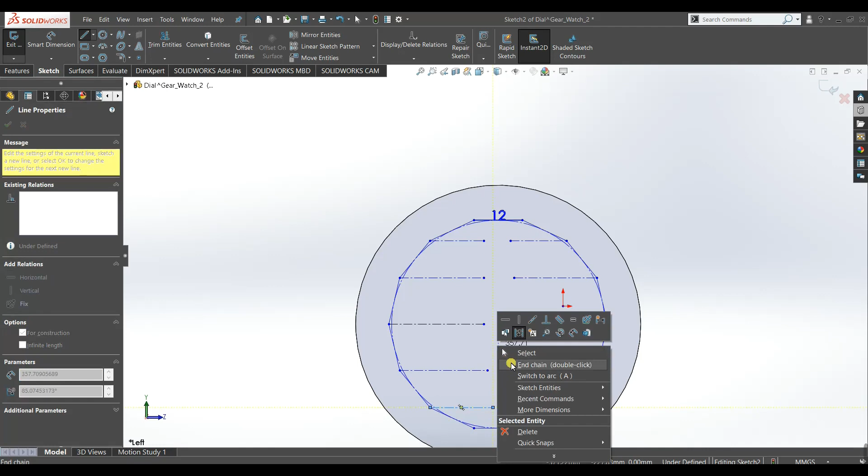Make it horizontal like this. Now here we will write 1, uncheck this, make it 55. We will select right align. You can see it is aligned right now. Now we will select this line, make it 2.

Now make it mid plane, accept it. Similarly, here it will go 11, make it 55. Here make it left align, accept.

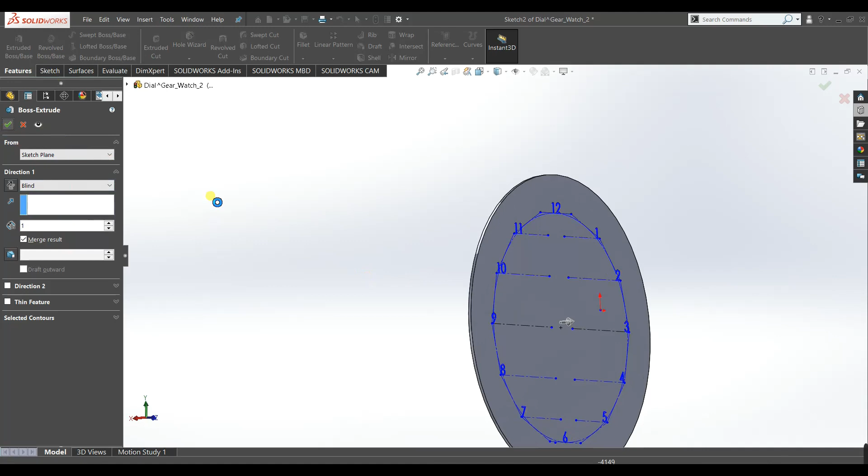Now our numbering has been completed. Make this line construction geometry only. Go to features, extruded boss base. You can see this sketch has been selected. You can extrude up to 0.4, it will do fine, or you can make it 1 or whatever you like. Now our number has been generated.

One more thing, we have to make a hole in between, so sketch on this. Make a hole of 9 mm. Go to features, extruded cut, make it through all, accept. Now our dial has been completed. Go back in assembly.

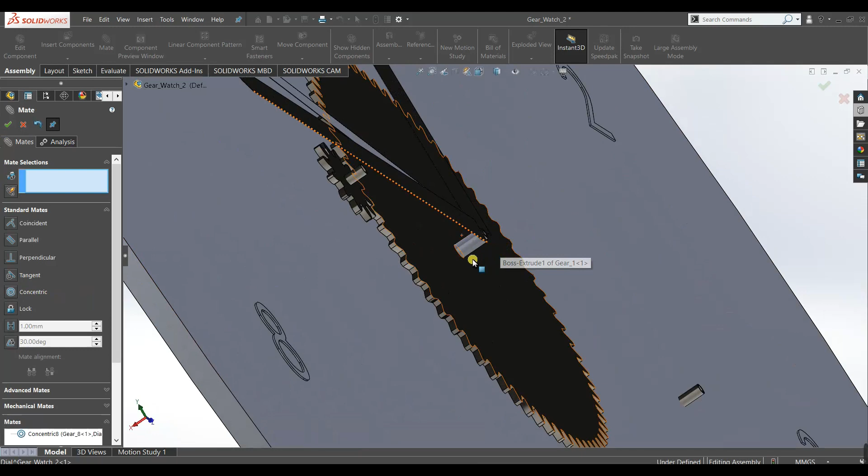Now make it float. First we will select this edge here, and this face, and make it concentric, accept. Now we will select the lower hand face and our dial face, and give it a width of 5 mm. Accept it. Now our clock has been created.

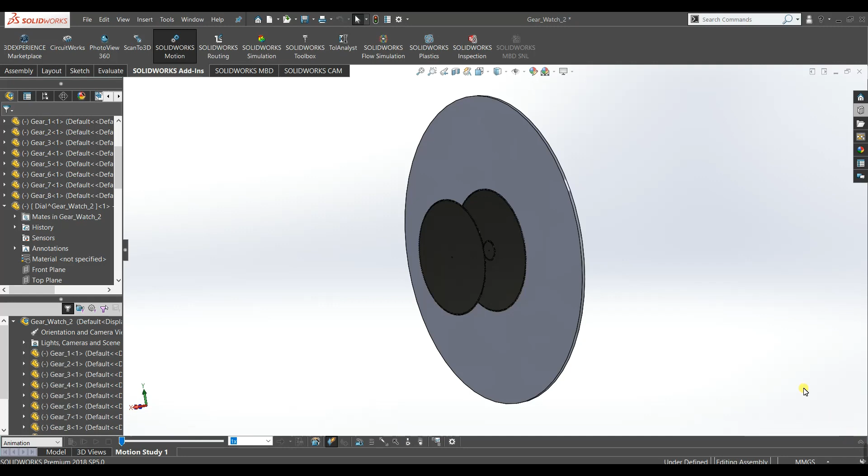Now we will add some motion to it. Go to motion study, drop down this, and go to motion analysis. Select motor. The seconds hand revolves at 1 rpm, so give it 1 rpm, make it constant speed and select this. You can edit the key point, make it 20 seconds to observe. Now calculate.

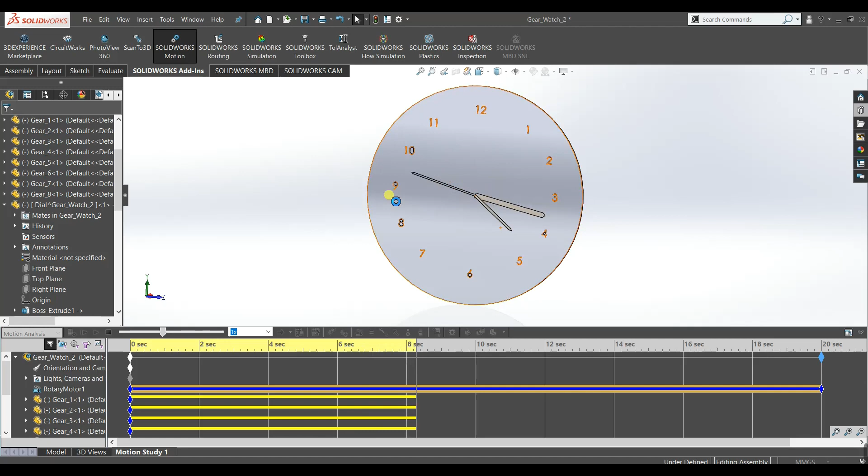Here you can see it is very slow. If you want to check it, make it 60 rpm. Now basically your seconds hand will move at 1 revolution per second, so you can check whether your calculation is right or not. This is your minute hand, this is your seconds hand, and this is your hour hand. All of these are moving in the right order. So you can run the animation.